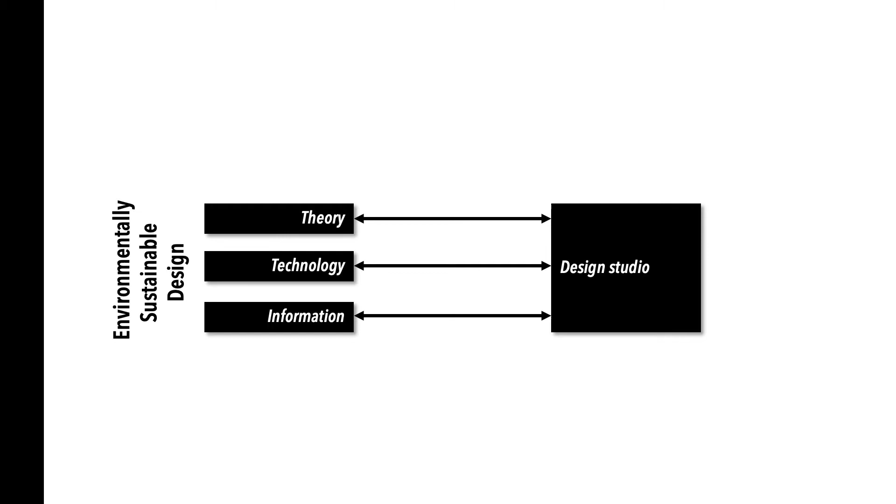Importantly, by integrating the Passive House principles into a design studio environment, we can effectively get students thinking beyond slap-on additive active technologies and get them back to basics and designing with passive design principles at the forefront of their mind.

So today we're going to show you what the Passive Aggressive Studio is in the context of the educational system that it's delivered in, delve into how we teach Passive House to students who have little experience with the practical use of ESD, the challenges and opportunities we've encountered along the way, and share some of the students' experiences from the studio. We'll also talk about how we as an industry and collection of professionals can better support Passive House being introduced into universities' environments.

So Passive Aggressive was an idea that we came up with when we were both living in Japan. Jim had just been to the second Passive House Asia conference in Tokyo, which was ironically being held at the university I was studying at the time. I was doing a second master's over there. And so the confluence of the conference and its location being like a few buildings away from my faculty got us talking about how Passive House could be introduced to students earlier.

We're both architects, we're both former board members of APHA from really, really early on. Jim consults on Passive House projects and I'm targeting a career in academia somewhere in the very distant future. So we thought that we were both pretty well placed to at least have a go at getting a design studio off the ground when we returned to Australia.

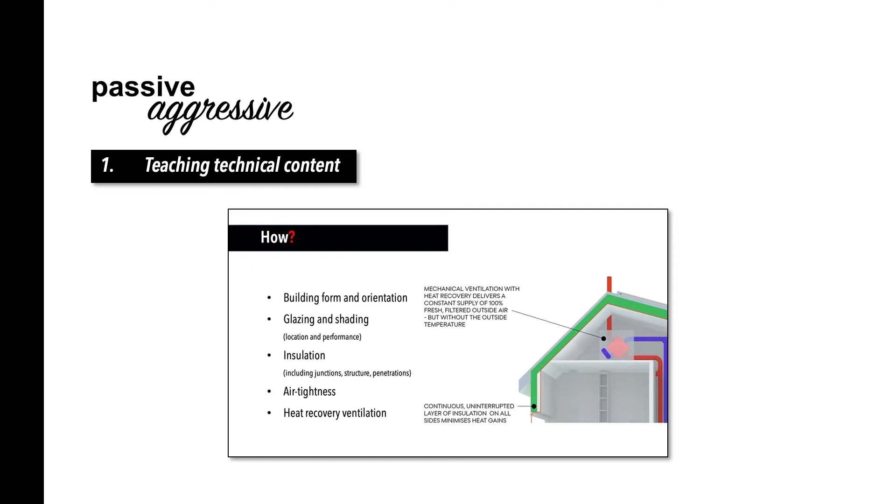So the first few weeks is a bit of a crash course on some super basic thermal physics—radiant, conductive and convective heat flows—and what it means to control these through building design and fabric. This is a challenge, because we don't want to lose the interest of those who already understand these things, but at the same time we don't want to leave anyone behind. So it's a bit of a delicate balancing act.

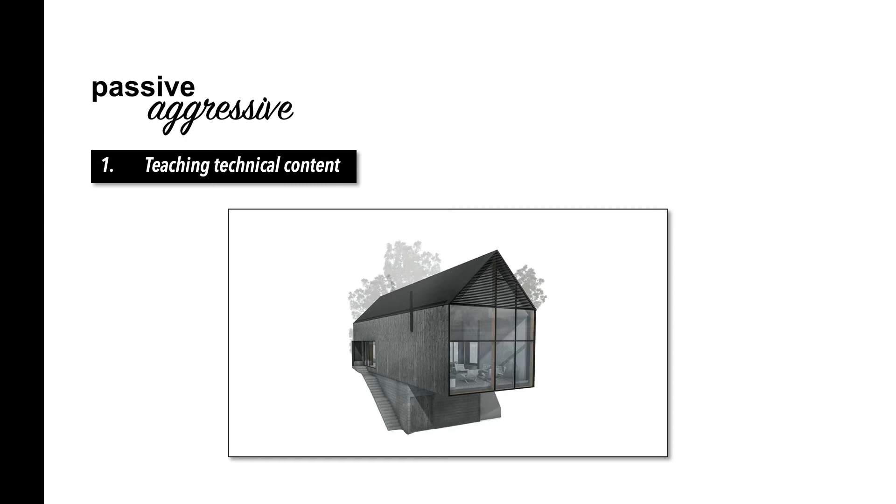As we cover each of the basics—insulation, glazing, shading, airtightness—we also explain how they're measured, how they're detailed, and how they're quantified in PHPP. We're fortunate to share some construction drawings of interesting and challenging projects, so students can learn, for example, what it means when your structure is a cantilevered steel frame, or you want a beautiful edge-to-edge corner between glass and weatherboard cladding.

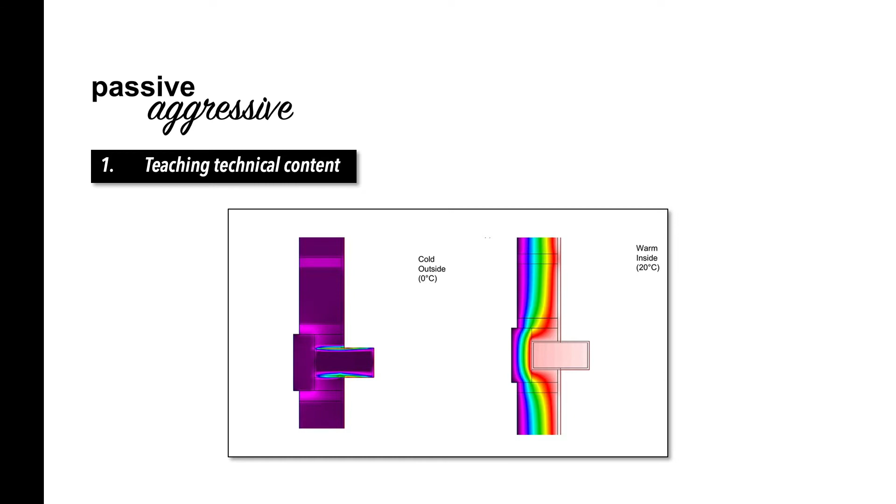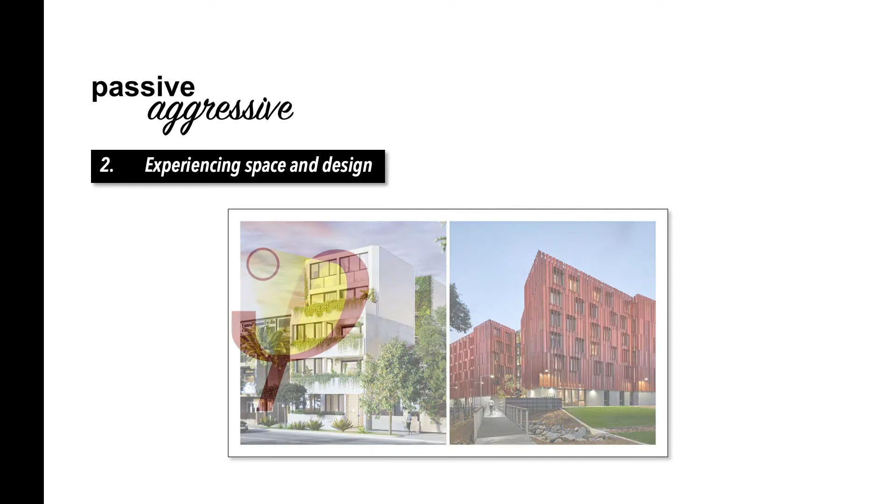The second part is around experiencing space and design, and here we're really reliant on the wonderful help from our friends and colleagues in the Passive House community. We start by showing students great examples of Passive House designs from all over the world—different shapes, sizes, building typologies, styles, materialities. It's important, especially in a design studio, for them to understand that Passive House, or any sustainable design approach, is not a style of its own, and it's not there to limit their creative freedom.

But infinitely more valuable than a slideshow in a classroom is real-world touch and feel. In semester 2 last year, we visited Claire Parry's home renovation in Melbourne in the later stages of construction, and got a surprise visit from the architect, Michael Markham, with some great stories shared amongst the group. We also arranged an extensive tour of Gillies Hall at Monash University. The students genuinely came away amazed at the feeling of that building—the sense of quiet, the fresh air, especially in a student accommodation project. A lot of them went in expecting it to be a bit stinky.

The way the windows worked—a lot of them were fascinated by tilt-turn windows. It was really eye-opening for them, especially in a building typology that so many of them were familiar with and actually living in at the time.

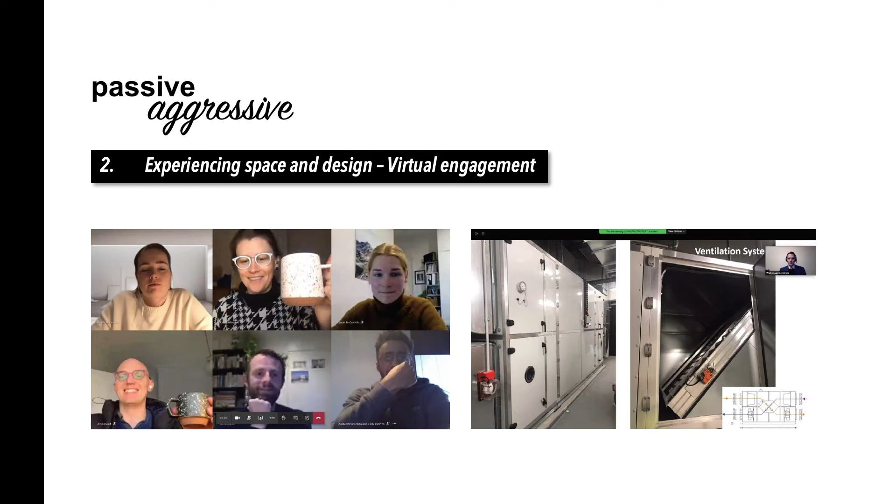Then 2020 threw us a curveball, and we weren't able to replicate the same physical experience. We started teaching face-to-face, but like the rest of the world, we ended up going online in week 3, which was an insane challenge. Still, we made the most of every opportunity for guest interaction, and we're really thankful to Johanna Trickett, Walter Vanderlind and Kate Nason for sharing their project experiences with our studio online, and talking one-on-one with students about their designs. We really hope the next iteration of Passive Aggressive will see us back out there in the real world, getting students able to touch, smell and listen to Passive House spaces. For this reason, we're currently not teaching the studio this semester since it's still online teaching, and we probably won't return until we can go back to full-time face-to-face.

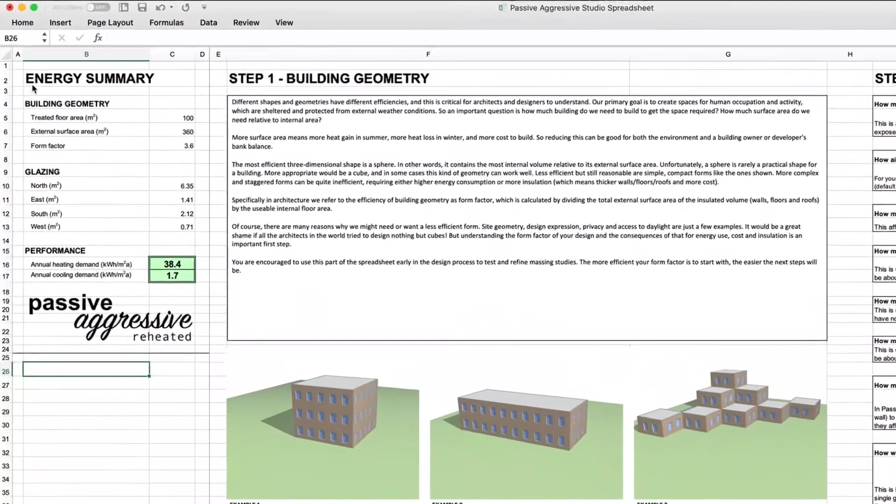Lastly, and most importantly, is how we get students to apply the principles hands-on. To do this, we've developed a heavily simplified single worksheet interface to sit over PHPP, aiming to be a teaching and learning tool that provides instantaneous feedback as students try different things with their design. In a 12-week studio with a design focus, it's simply impossible and impractical to get students using PHPP in full. So on the left-hand side, we have an energy summary showing the all-important annual heating and cooling demands, as well as basics like treated floor area, external envelope area, resulting form factor, and glazing orientations. This provides live feedback as students complete the rest of the sheet, and it exports as a stamp for them to place on their final panels.

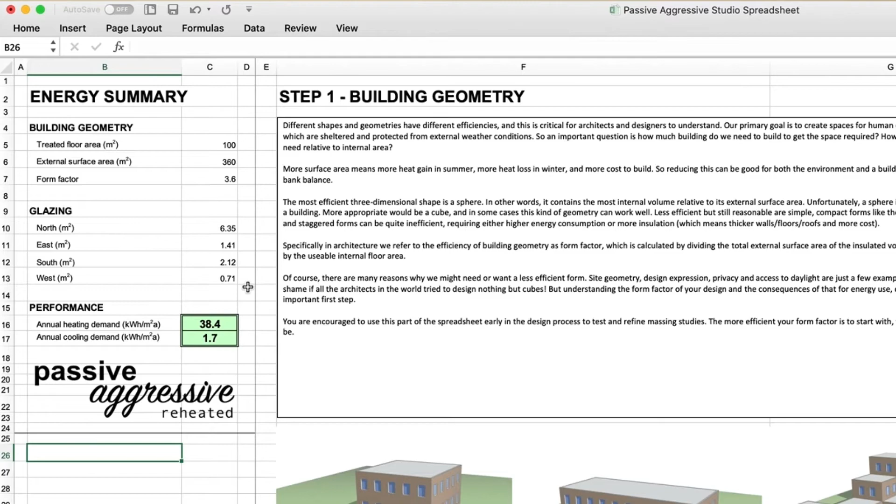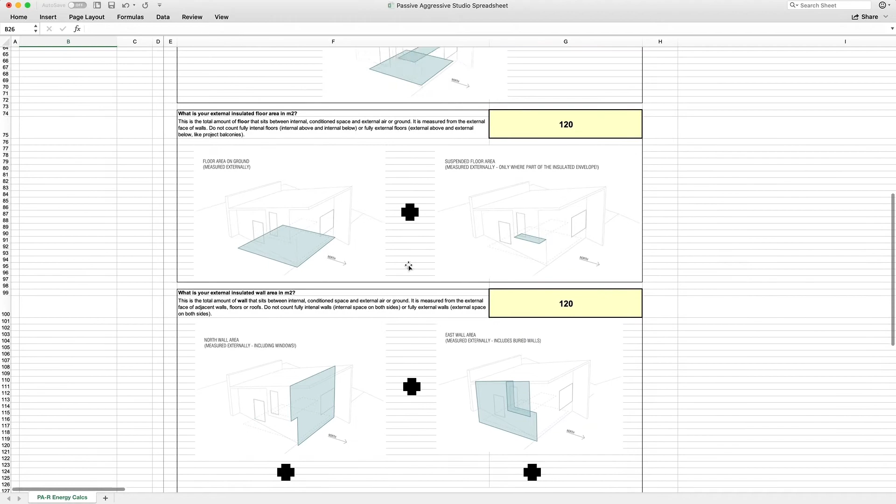Moving to the right, the first step is for students to enter the basic geometry of their design—treated floor area, floor envelope area, wall envelope area, and roof envelope area. This is an opportunity to learn about that most fundamental of passive design considerations, form factor. We stress in the studio that we don't want everyone to design cubes or spheres, but we do want them to understand the implications of more complex shapes—that more surface area means both more cost and either thicker insulation or worse performance.

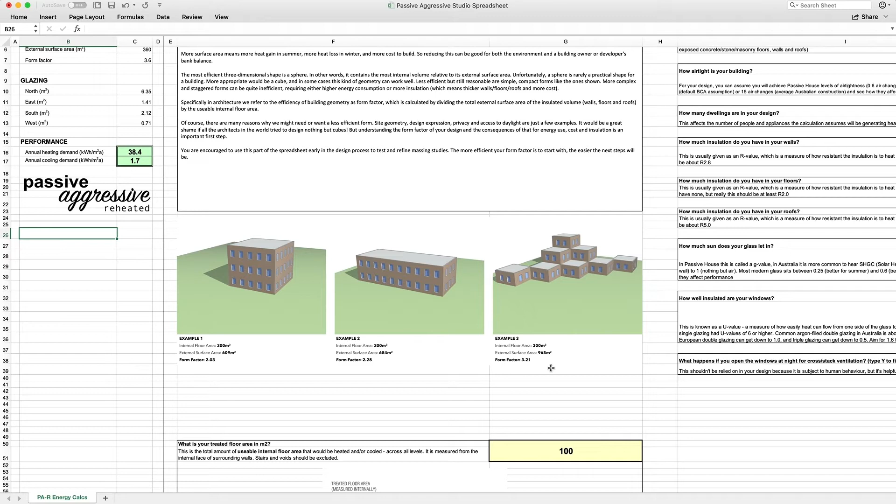The second step is to play with some of the key values that determine building performance. So we ask them to rate how lightweight or massive their building is, depending on the materiality they're intending to use, and see how this affects performance by trying different values. We say they can assume 0.6 air changes per hour for their final design, but we also ask them to play with this value and see what happens if it's 5 or if it's 15 instead.

It's a residential studio, their projects are residential, so they key in how many dwellings are in the building for the sake of internal heat gains.

The first time we ran this studio, we asked them to enter all the details of the wall, floor and roof build-ups, basically completing a stripped down version of the U-values sheet. But we found this inevitably led to a deal of confusion and time lost that could have been better spent elsewhere.

So for the second iteration, we simply asked them to enter R values for wall, floor and roof insulation. This gives them immediate feedback of what thickness to allow for in their details. On the back end, we've built in typical assumptions for framing and claddings and the like.

Glass is similar. We built in assumptions for frame values and such, but we asked students to play with the G value and the UG value to balance summer and winter performance and see what different values deliver. And lastly, there's a simple checkbox to see what difference can be made simply by opening windows overnight in summer.

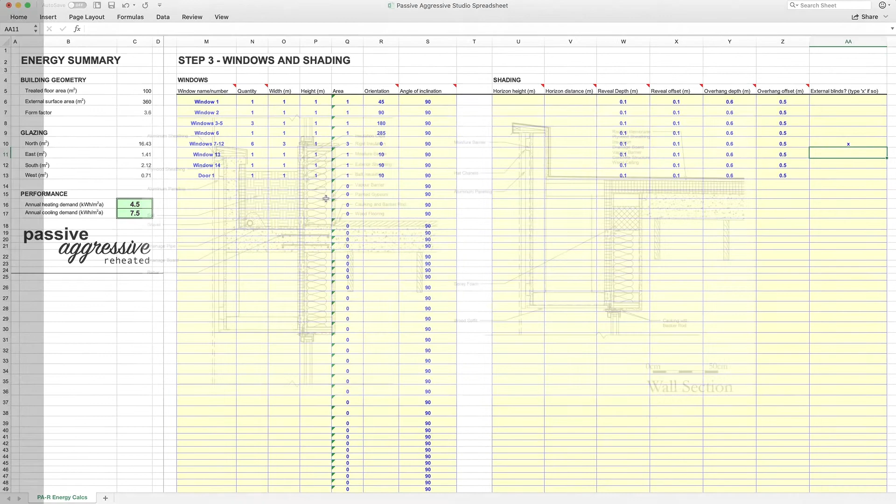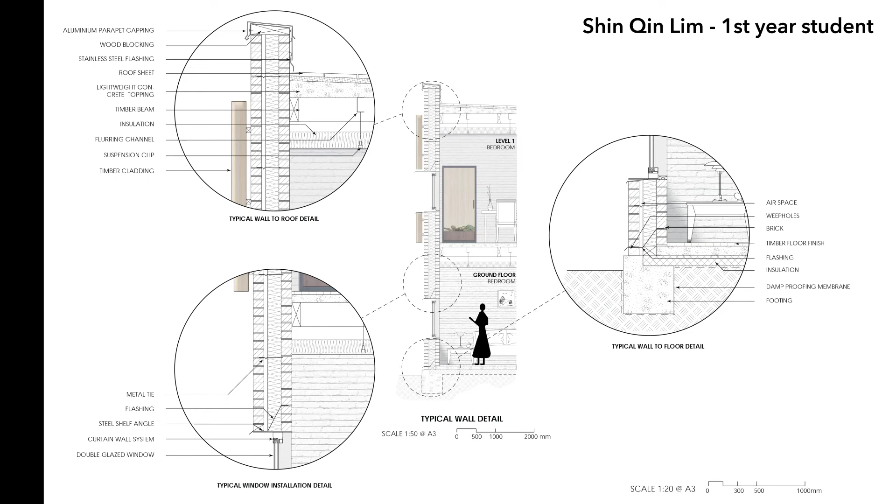Once the students have resolved their designs and fine-tuned performance in the spreadsheet, the last thing we ask them to do is prepare a section detail demonstrating how they incorporate the amount of insulation they've specified, how they avoid thermal bridges, how they might treat their window reveals, and so on.

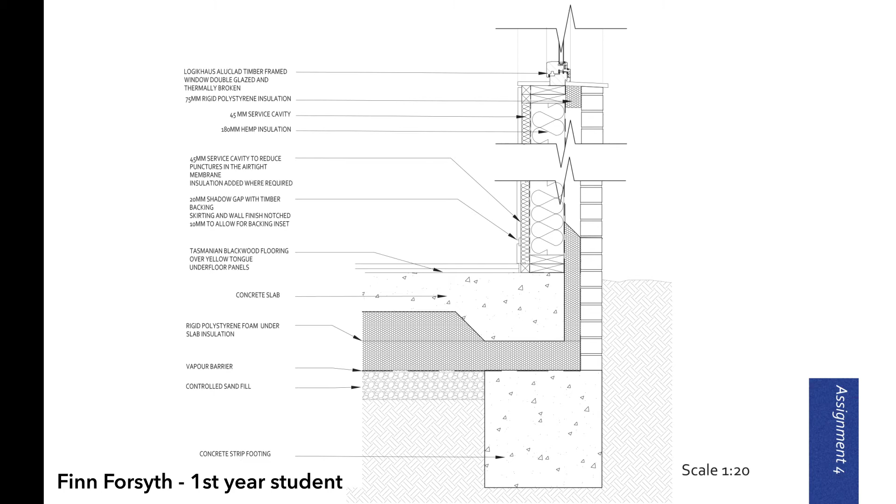This is something that some students have absolutely zero experience in doing at all, or if they do, it's often in the abstract sense of having redrawn someone else's detail in a construction subject. Very few of them have ever considered how construction details can actually inform and reinforce their designs.

Some students hate it, of course, like you just have students that don't like detailing for whatever reason. But a surprising number of them have actually relished this part of the studio and say it opens their eyes to architectural considerations they've never previously thought of.

So that basically sums up what we do and how we implement Passive House within a design studio: teaching technical content, experiencing space and design, and applying the principles hands-on.

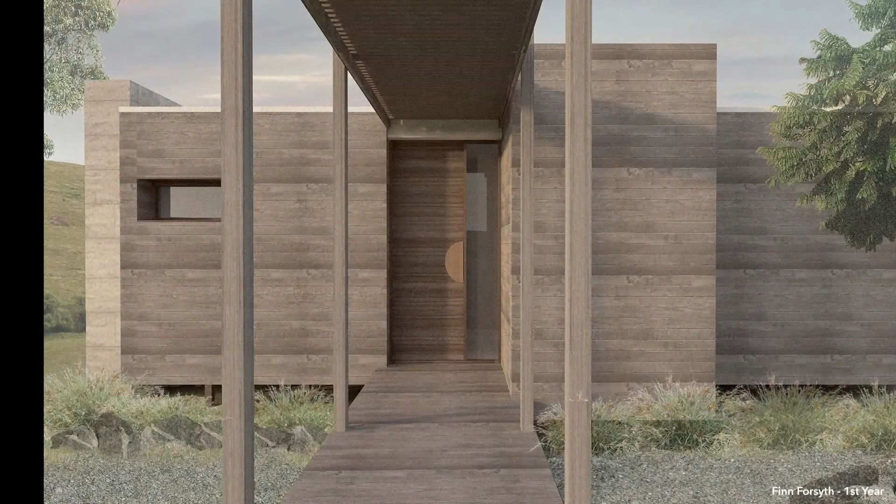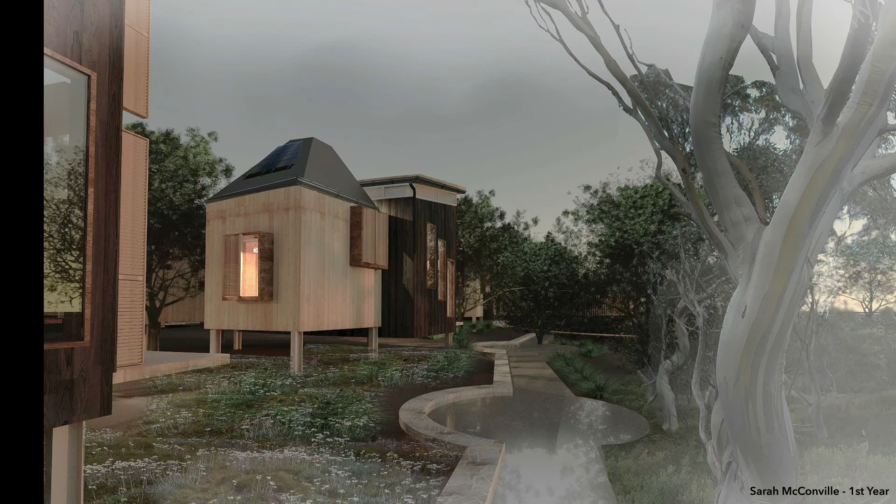Over the 2 semesters that we've taught, we've had students present some really great work. The first semester saw students design a small house with a size limit of 60 square metres, located on a rural site, so it was like a baptism of fire when it came to Passive House. Then for their major project, they did an urban infill accommodation design.

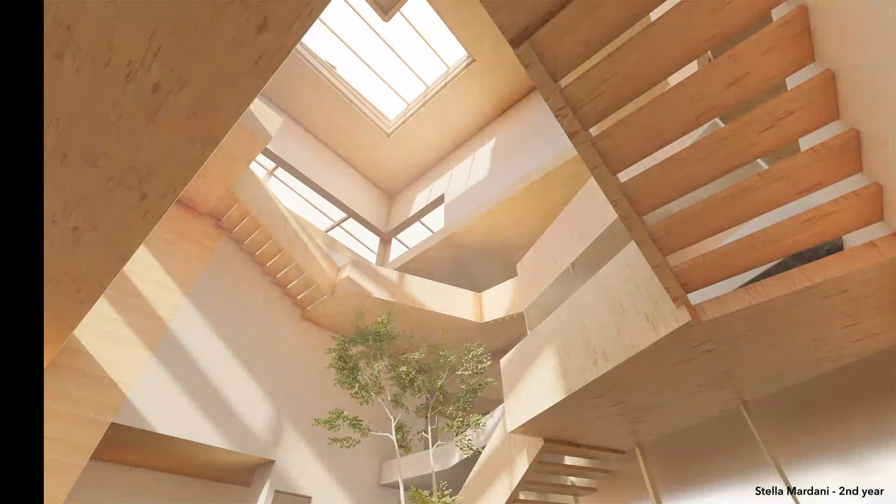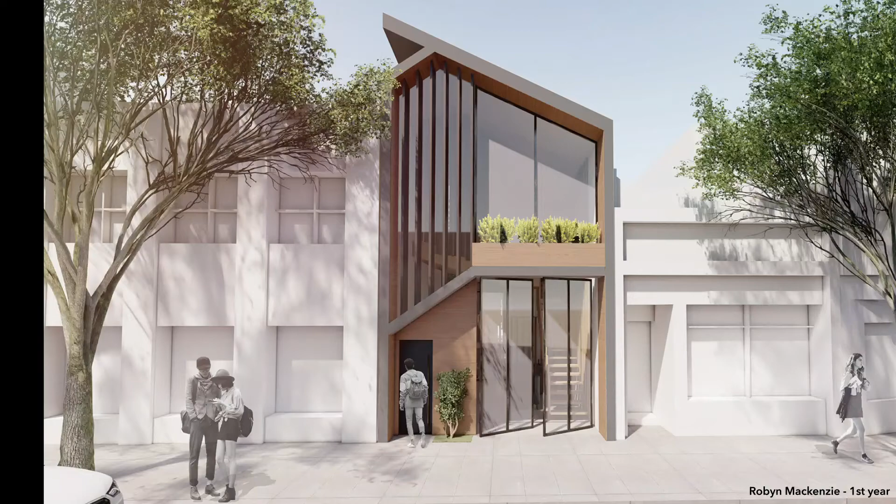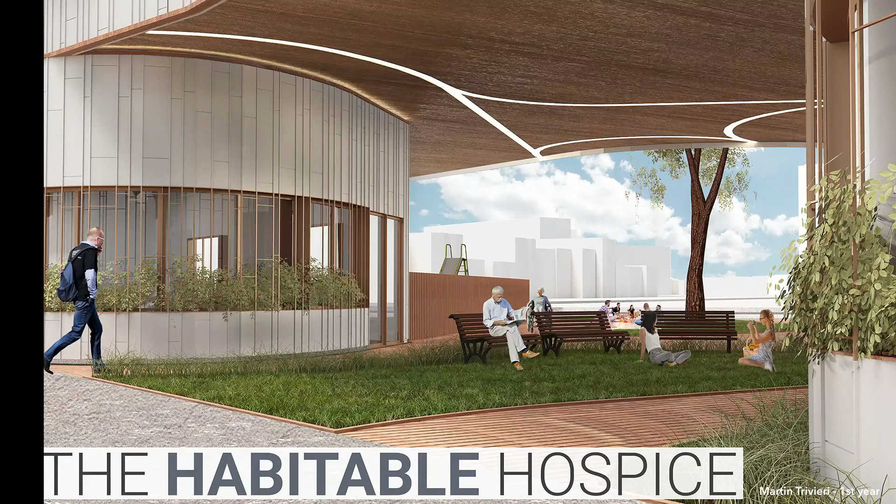In the second iteration, which we aptly called Passive Aggressive Reheated, students had an experiential space to focus on for their first design exercise, expressing a core experience of dwelling, so they had to create a building for eating, or a building for resting, or a building for bathing. Then for their final major project, just like the first semester, they had an urban infill accommodation building.

For all the projects, except for the experiential space in the second semester we taught, the spreadsheet and the detail were required.

Images of student work are nice artifacts of the studio experience. However, images alone don't really tell us what a student's experience of being exposed to Passive House was. So to understand the impact of the studio on the learning experience, we had our students also complete a written reflection at the end of the semester on 2 things: what they thought of the standard and what they thought of the studio itself. When it came to reflections on the Passive House standard, we had some really interesting opinions that we thought might be interesting to share.

In our first semester, our top student, Stella, noted that she saw the Passive House standard as being part of the puzzle. She noted that the standard alone is an incomplete view of sustainability, but definitely a critical step in the process.

Others found that historically the standard was quite limiting when it came to architectural expression, and some other students took a more critical stance to Australia's participation in the global Passive House landscape, noting that they found it disappointing that Passive House was still very much a niche in Australia.

One of our more insightful, mature age students from the past semester noted that from the outside, Passive House can come across as elite and unattainable for most. And in Australia, for the most part, this may be the case for the moment. However, after my introduction to Passive House throughout the semester, I have seen it is much simpler than I had first imagined.

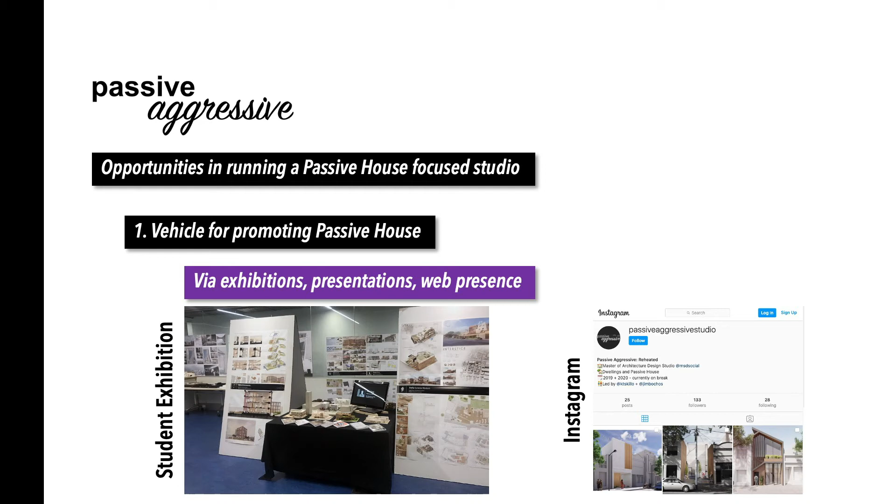Secondly, we think Passive House as a framework is a great mechanism for delivering a practical understanding of general passive design strategies. So going beyond theoretical understanding and getting students to exercise that strategy in their work. Although for older generation architects and those of us with an active understanding of these principles, this may seem like very low-hanging fruit, you'd be surprised just how little experience students have in actually using these principles in their own work.

Another reason we think Passive House is great for reinforcing these basic principles is PHPP itself. The fact that it uses a spreadsheet base means it's easy for us to adapt the interface into a simple and valuable learning tool, regardless of what drafting or modelling program students might be familiar with. By virtue of its monthly calculations, it can provide instantaneous feedback to trial and error inputs in a way that most energy modelling tools can't.

Currently, we're not aware of any other architecture design studios implementing Passive House as a core part of their curriculum in the South Pacific region. But if you are, let's have a chat. We'd really be interested to hear.

But if you think about it, just in the Melbourne and Geelong corridor alone, universities are graduating over 1,000 Master of Architecture graduates each year. And some universities, like Monash University, are really heavily pursuing the Passive House standard in upgrading and developing their building stock. So we think there is definitely scope for better support for Passive House education in the university environment.